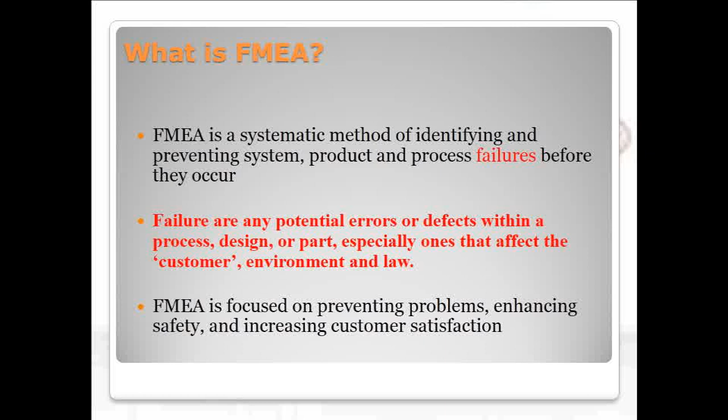FMEA is a design tool for assessing risk associated with the different ways, modes in which a part or a system can fail, identifies the effects of those failures and provides a structure for revising the design to mitigate risk where it is necessary.

It tries to question the process. If this failure occurred, then what could happen? It provides a method for quantitative analysis of risk. Quantitative means explaining the risk using numbers. After FMEA, the initial design can be refined to get an improved design and so on to find the final refined design with rarely any modes of failures.

It also provides details about the design team, who are all the people responsible for the design of the system, who are responsible for the refinement of the design, etc. The FMEA document allows somebody later to come back and review the work and use it for future designs.

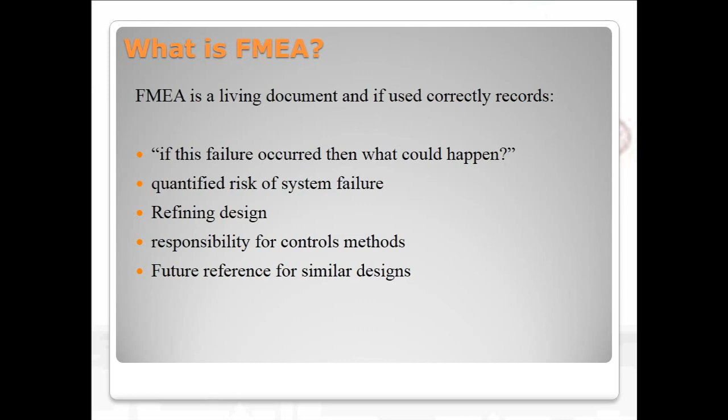Why do we do FMEA normally? Most of the Indian companies didn't use FMEA in the past. If you have noticed, product refinement happens innumerable times after the product is introduced into the market. For example, the Bajaj Pulsar's petrol tank shape, exhaust silencer, front cowl, etc. and the Tata Indica 1998 model have seen product refinements after these products were introduced into the market.

So the design needs to be changed after the product fails in the customer's hand, which is a costly affair. If FMEA has been done, the cost of design refinement changes can be saved, which will lead to increased profits. Customers always expect a product of high quality, and using FMEA, a product of high quality and very rare failures can be supplied to the customers.

Durability of the product will increase, which in turn leads to extended warranty periods. Product development times can be reduced if all the requirements of the customers are put into the product and checked for errors in the design stage itself. Safety and reliability of the products can be ascertained using FMEA.

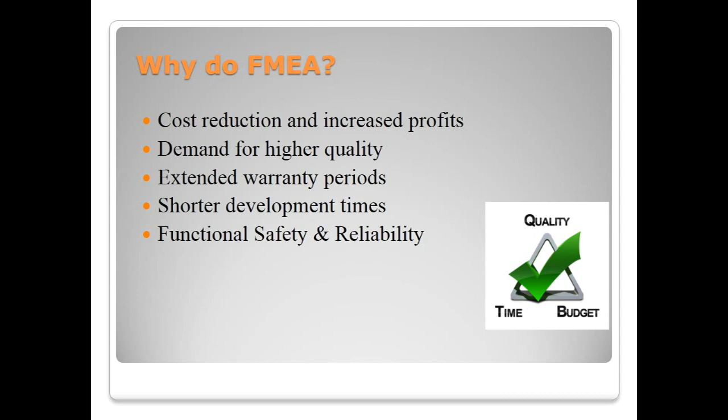Different types of FMEA. Different types of FMEA analysis exist, such as system FMEA, design FMEA, process FMEA. System FMEA is the highest level of analysis of an entire system that is made up of various subsystems. The focus is on the functions and relationships that are unique to the system as a whole.

The system FMEA includes failure modes associated with interfaces and interactions in addition to considering single point failures. It is done during the conception stage by the R&D department.

Design FMEA. Design FMEA is done during the design stage to identify any potential failure modes and causes that can occur during the manufacturing or assembly process, which are the result of the design. At the end of the design FMEA, a prototype with rarely any failure modes is built.

Process FMEA. Process FMEA is required for all new parts or processes, changed parts or processes, and carryover parts or processes in new applications or environments. The process FMEA document should be initiated before or at the feasibility stage prior to tooling for production and take into account all manufacturing operations from individual components to assemblies.

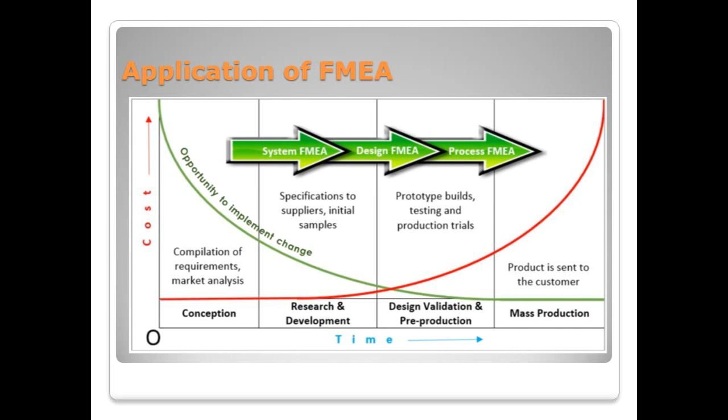FMEA steps. First step, we are going to identify the modes of failures. For example, if you are looking at a car, the car won't stop. What may be the reasons? Brake lever stuck, or brake wire disconnected, or braking fluid inadequate, etc. That is the different ways in which the failure may happen.

Identify the consequences and related systems for each mode of failure is the second step. Example, consequence may be if the car won't stop, it may cause an accident, cause you to speed when you have to stop the car. The third step is we are going to rate the severity of each effect. If the failure mode causes an accident, the severity is very high. We rate the severity on a scale of 1 to 10, meaning 1 is less severe and 10 is very highly severe.

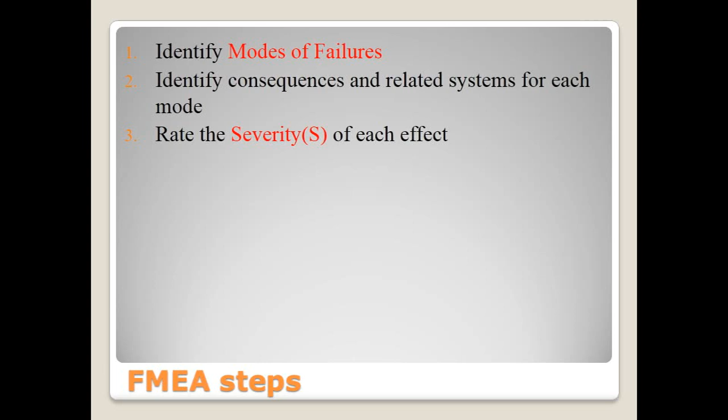Then we identify the potential root causes for each failure mode. So we are going to check why the car won't stop, what causes the car not to stop. Maybe the user was not applying the brake on time, or the user was driving too fast, or the braking system won't work, or the worn out tires, etc. There are a lot of different possible causes of failure modes.

Then we are going to rate the probability of occurrence of each root cause. We rate occurrence probability on a scale of 1 to 10, where 1 means probability of occurrence of failure is very less and 10 means the probability of occurrence is very high.

Next, we are going to identify process control indicators. If at all there is any problem with the braking system, does the car have any system for indicating that there is a problem with the braking system? Like how we have indicators for seat belts, door not closed properly, etc. Or by simply checking whether brake levers are stuck or is there any screeching sound during braking.

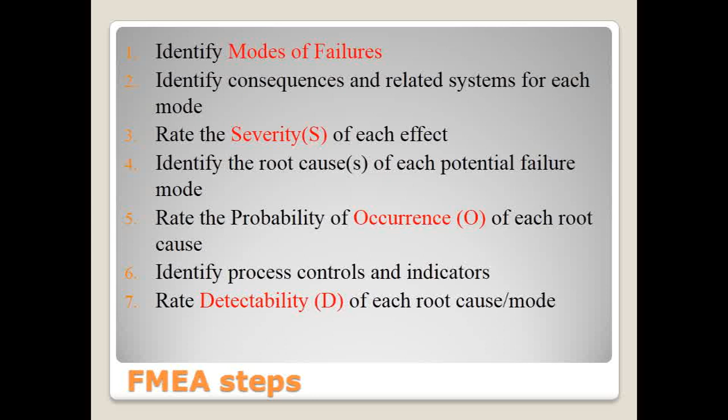Very hard to detect. Next, we need to calculate the risk prioritization number, which is severity times occurrence times detection. RPN is equal to S into O into D. From this RPN, which ranges from 1 to 1000, we can identify which failure mode is very critical. If the failure mode RPN is very large, nearer to 1000, that failure mode is very critical and first priority is given to this failure mode to address the design deficiency. If the failure mode is not addressed initially, it is going to cause a huge damage or some undesirable conditions.

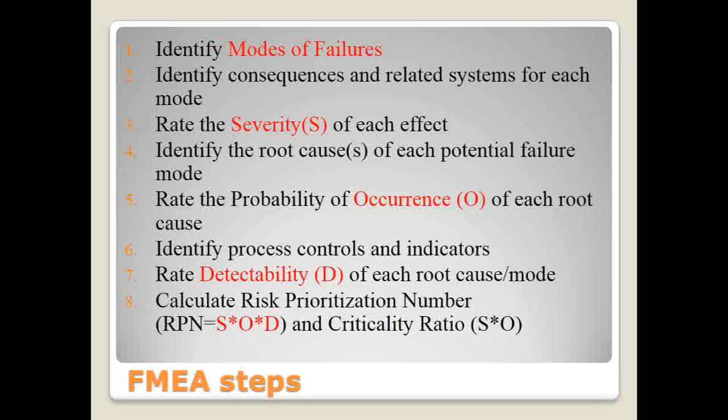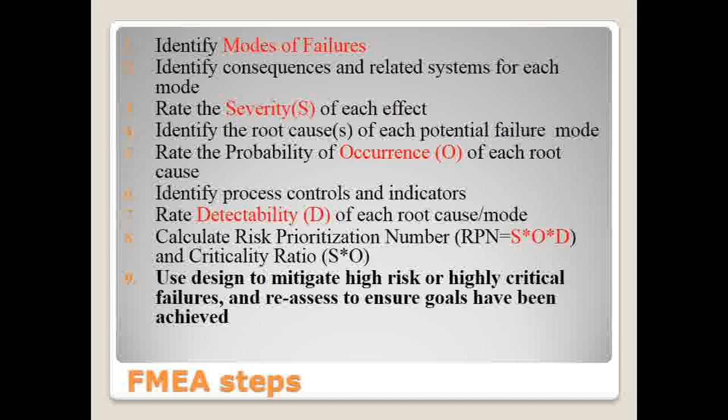Last step is the most important step in the process. We are going to use design to mitigate high risk or high critical failure and reassess to ensure goals have been achieved. So we are going to assign a team from the R&D to study the failure of the braking system, in this case, the root causes and what needs to be done to remove the failure mode from occurring. So all this happens during the design stage itself.

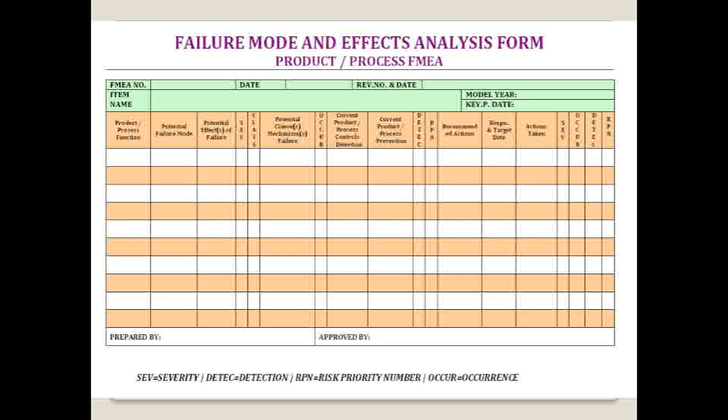Like this braking system, there are n number of components and parts in a car. So during the design stage, we use FMEA to identify whether the system designed in a particular way may fail. If so, how to stop the failure mode from happening. So we refine the design again and again by applying FMEA to design the best, safe, reliable product for the customers to use. And this is the structure of the FMEA document. Details about the minutest component of the product need to be filled up in the document. And this FMEA document is used for future references.